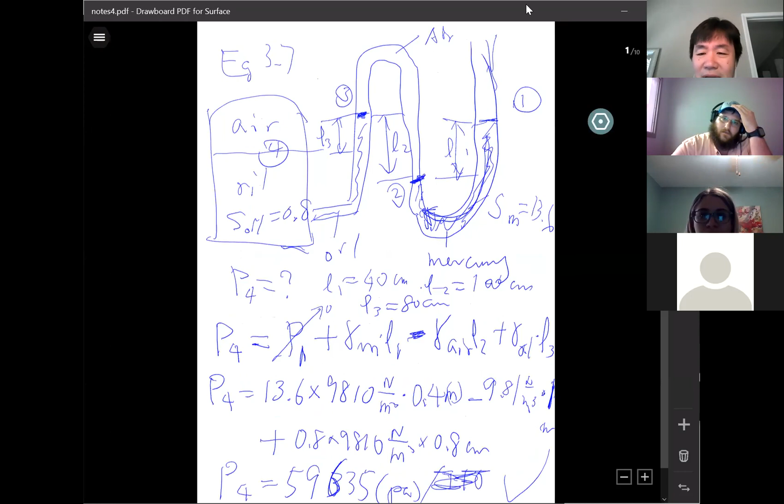Okay, that's the equation I introduced last time. I want everybody to fully understand and completely memorize this method, this equation to calculate the pressure. This is the equation derived from the basic theory in the previous notes, between 2 points on the same fluid, right? P1 plus gamma Z1 equals P2 plus gamma Z2. For each single fluid, you can have 2 points to compare. That's the hydrostatic principle. So if you have multiple fluids, you add those equations all together and it becomes this.

Let's review it again. I just want you to memorize this method, okay? You have to have the starting point and the ending point for the problem. For example, in this problem, you have starting point 1 at the end of the manometer, and your ending point 4, the end of your system, on the surface of the oil in the tank. So you can directly find your end pressure 4 based on the beginning pressure 1 plus all the manometer readings in between. That's the very easy method to do, but you have to remember it.

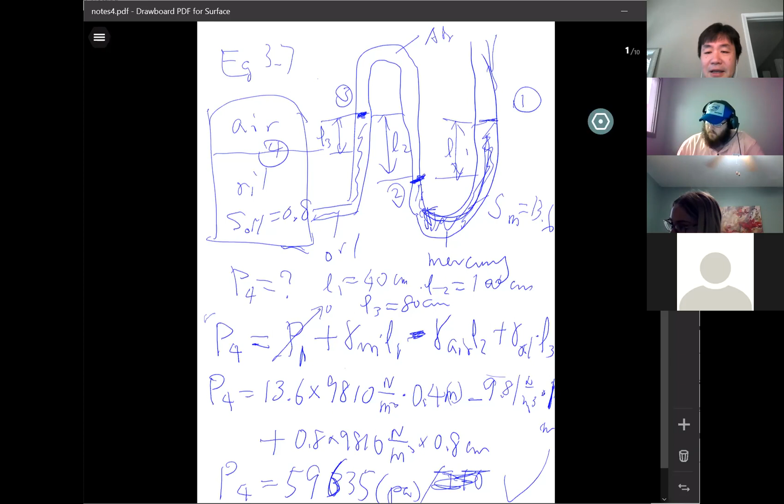So, continue on this. Let me give you one more example on the hydrostatic calculation. I think this topic is very important, and that's why I want to spend a little bit more time on it today.

This problem everybody hates. All the students hate this problem. It's an inclined tube. Every time students see an inclined tube, they don't like it. But I really want you to actually like it. It's a piece of cake to you at the end, I want.

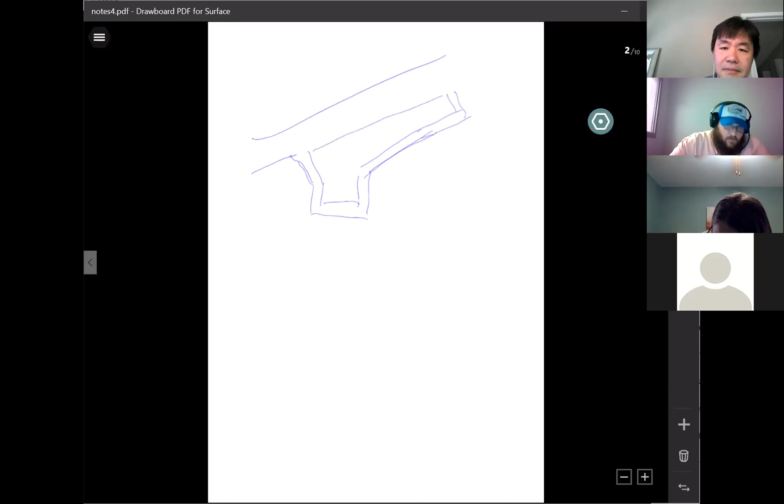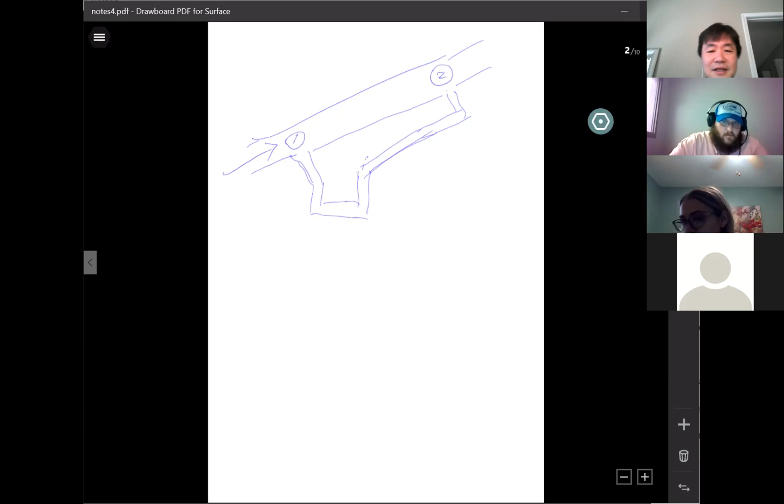Okay, you have a pipe with flowing fluid. So that's bad, right? With flowing fluid in the pipe, I don't have an equation for you yet. So far you haven't learned anything for flowing fluid. Remember, this is chapter 3, hydrostatics - statics. So if you have a flowing fluid, don't try to apply the hydrostatics equation between 1 and 2. That's wrong. Sometimes if you're lucky, depending on the condition, you might get the same answer, but it's prohibited in our class. If between a flowing fluid's 2 points you apply P1 plus gamma Z1 equals P2 plus gamma Z2, no matter what kind of result you have, I will give you totally wrong.

So with 2 conditions, the hydrostatic equation can be applied to flowing fluid: when 1 and 2 have the same velocity, and there's no loss in the pipe. I don't think that's a condition you'll have for most situations. Of course, there's always loss when the fluid starts to flow. So you can't apply hydrostatics between 1 and 2 - just keep that in mind. That's why if we want to know the pressure, we need the manometer down here with a shape like this.

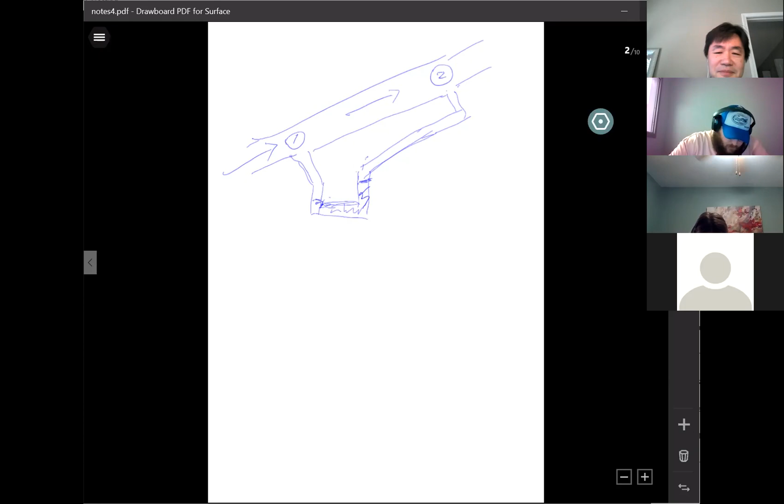Okay, with a shape like this. This is called a manometer - a simple manometer. Like I can draw some for you. Let me draw here, I'll erase it later.

Let's say I have a pipe, and I want to know the pressure in the pipe. What people do is drill a hole in the pipe, then add a tube here. What happens to the tube? The fluid is going to rise in the tube, right? Because internally in the pipe there's higher pressure. This is the simplest manometer, you know.

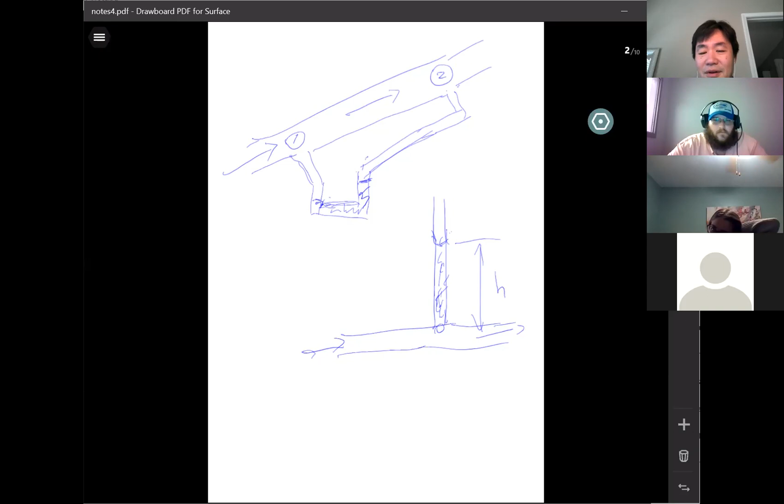How high - what is the pressure? Can you just measure the distance h? If you're given h as 2 feet, can you find the pressure inside? What does that mean if it's 2 feet? What is the pressure? Let's say this is water in there - water pipe.

Manometer is a direct application of the hydrostatic principle. I want everybody to know how to do that. It gives you 2 feet of pressure - let's say 2 feet of height for the manometer. So what is the pressure? Can you do this? Can you calculate the pressure inside?

Let's say the pressure just at this point near the entrance of the tube. Remember, this is a flowing fluid, so your hydrostatic principle is not applying - it's not going to apply to 2 points inside the pipe. So in this problem, what are the 2 points you're going to use to apply the hydrostatic principle?

That's the first task for every problem I give you: you have to mark down your locations, 1 and 2. It's required in every problem I give you. So, where are 1 and 2? Where are 1 and 2's locations?

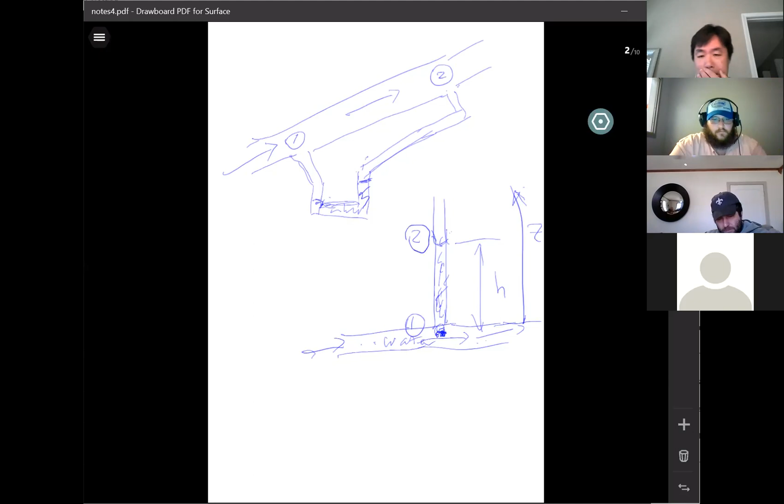At h equals 0 and h, you said h equals 2 at the top? Okay, strictly speaking you shouldn't say h equal to 0 — h is a given value. So in the z dimension, this is the axis. When z equals 0, that's your first point. When z equals h, that's your second point. I understand what you're talking about, but it's not a correct way to say it. In this class, I want you to use the correct language. Does that make sense?

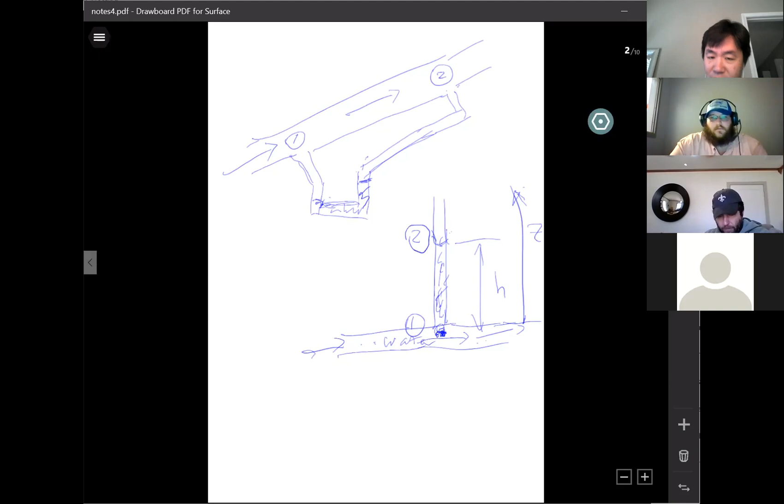Yeah, right, okay, so that's correct. Put down 1 and 2. So what is the question here?

We are asked to solve the pressure, right? What is the pressure inside the pipe at this location? Let's say at point 1 — that's the pressure we want to find out, on the tip of the tube, which belongs to the pipe. Let's assume the pressure is the same along a cross section of the pipe. That's usually what we can assume, since the pipe is basically small along the cross section, so we can pick the point just on the surface of the pipe.

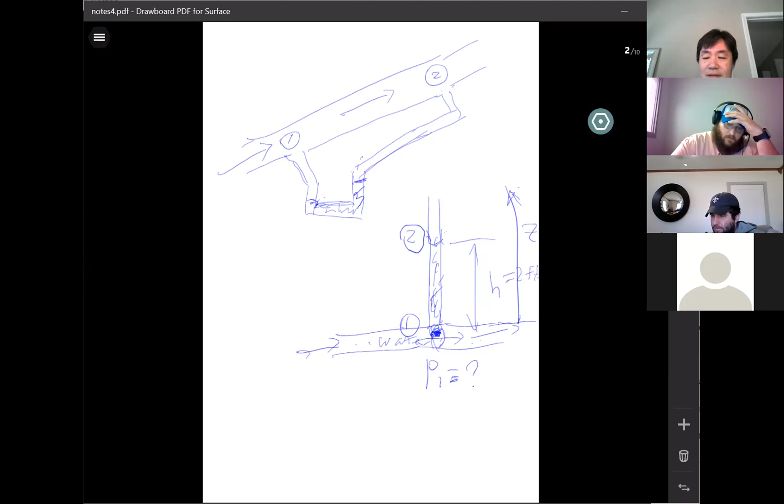So that's our goal, right? We want to calculate P1. So what is P1? Let's say h is 2 feet. What is the P1 value? How do you calculate it? Come on, everybody can do it, right? Gamma H. Yeah, gamma times H.

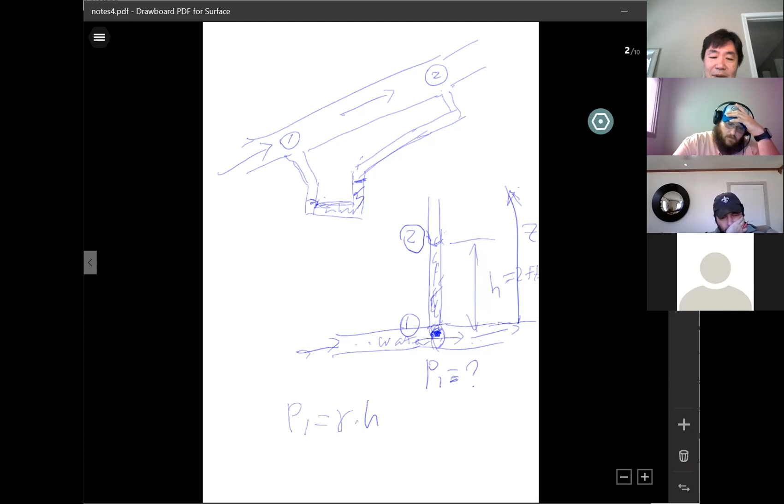Why is it gamma times H? It's P1 plus gamma Z1 equals P2 plus gamma Z2. It starts from there, okay, you're good. Now you can directly say P1 equals gamma H, but actually it comes from the hydrostatic principle like this, because P2 is 0, open to the atmosphere, and Z1 is 0. That's why P1 equals gamma Z2, which is H. Is that clear to everybody? Does that make sense?

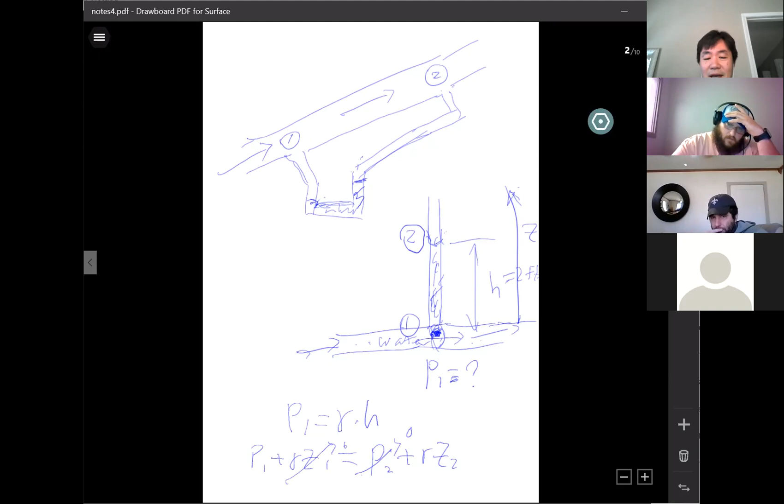Okay, so that's a simple manometer. Again, this starts from the hydrostatic equation — everything starts from that equation. That's why you need points 1 and 2. Here it's simple because point 2 is 0, so P1 equals just gamma H. If P2 had some value, it would be a different story.

That good? This is the simplest manometer, but your boss will kill you if you do something like this in the piping system in his plant. You're going to drill a hole in it — what the heck, and plus the tube is going to be so tall eventually. Usually the pressure in there is going to be high, maybe 2 atm, 14.7 psi gauge — it would go to maybe 30 feet if it's one actual atmosphere pressure inside the pipe.

It could go probably 30 feet for the tube you'd need. Do you have a 30-foot tube to put on the pipe in the factory? No, I don't think so. That's not feasible — this is really bad. This is theory only. On theory it works like this, but in reality it's difficult to apply.

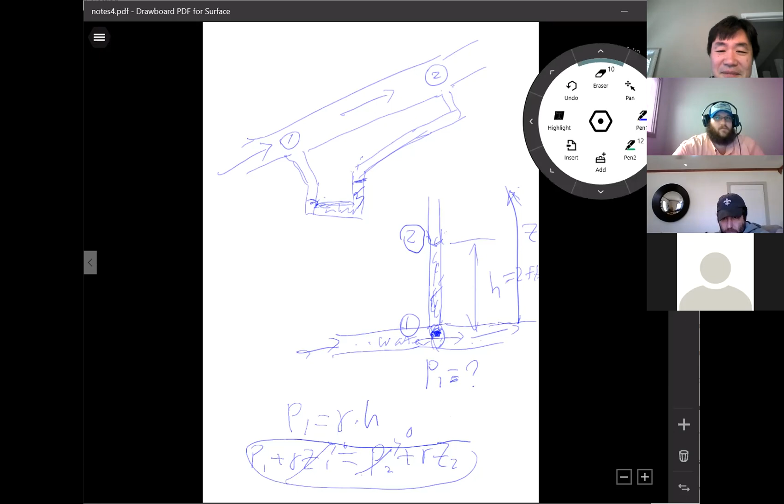But you see, 200 years ago, people wanted to do this, right? Let me erase this thing. So people had no choice at that time — you don't have the pressure tap, you don't have the pressure transducer, or those kinds of electrical tools like 200-300 years ago. But the industrial revolution starts, right? They have to know the pressure, they have to know the fluid system.

So what did they do — people are smart, right? Some engineer designed something like, okay, if this thing is too high, there are two restrictions: one is drilling a hole, the other is the tube being too high to measure pressure. Maybe my boss allows me to drill a hole if we really need to know the pressure, but if it's too high, it's difficult. So engineers are smart — instead of drilling a hole on top of the pipe, they drill a hole on the bottom of the pipe.

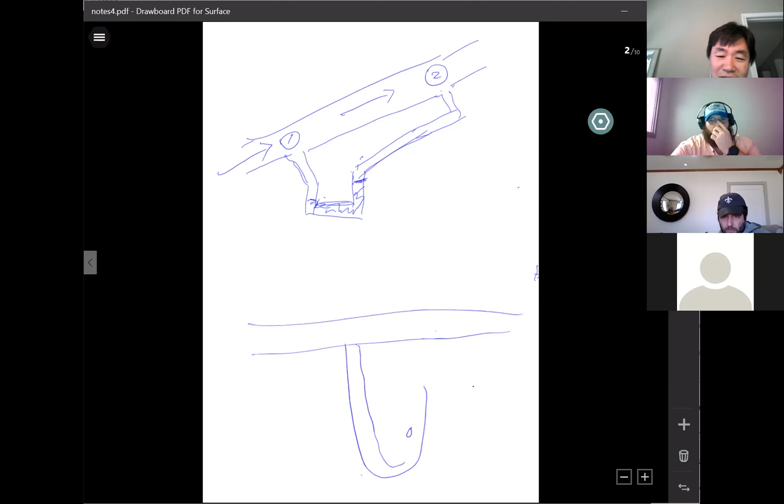And they put a U shape, then put a fluid there — a very heavy fluid so it won't push the fluid up too much. Then you don't need a really long tube. You go down, make a U shape, and put some heavy fluid like mercury. So your internal pressure of the pipe only pushes the mercury a little bit because mercury is so heavy. Then based on the calculation, the deflection here — let's say H is the mercury deflection — can you find the pressure here?

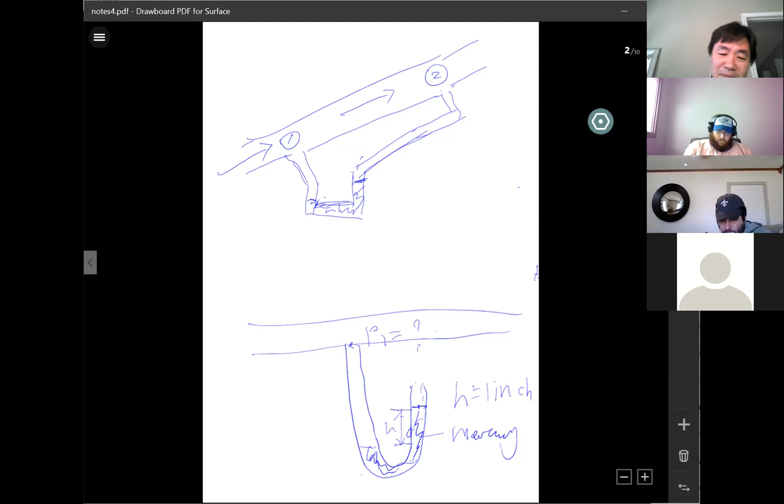Okay, you really need to do this. This really needs to be really familiar. You need to be really familiar with this calculation, otherwise there's no hope of passing this class. So how do you calculate P1? Tell me. Let's say I can measure a distance A here.

Okay, whatever value, depending on how long the device is, right? Let's just use the letter A. Okay, how do you calculate it? You tell me how to do it. What's the first step?

I really like to communicate with you, talk with you guys. Number your interfaces, or number your points. That's right, great Josh, I like it. That's exactly the right way, number your interfaces, number your points.

Okay, 1, 2, 3. I think obviously this one has 3 points. So P1 is our goal. So what's the first step? Maybe you're gonna do. Hey, you can do that method we just learned.

There's multiple fluids here. I don't want you to put 2 equations. Let's just do 1 equation. How about that? Anybody? Give me the equation. I just want 1 equation, directly find out our P1.

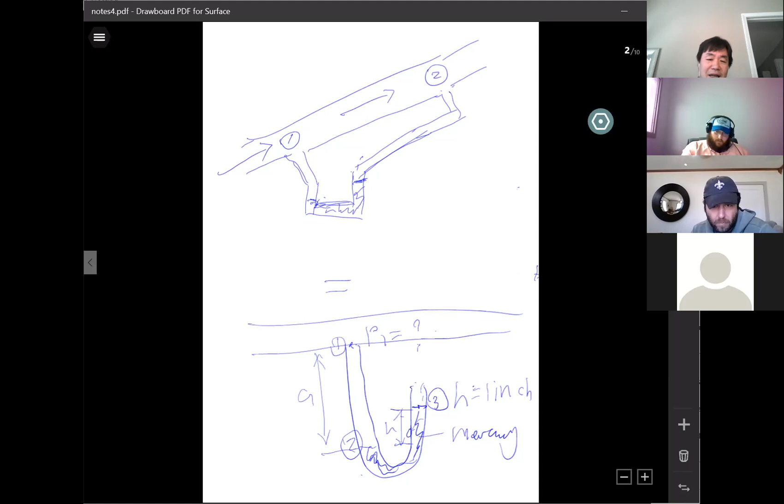So, equal sign. You see, I really like equations, right? Put the equal sign first. I'm gonna have an equation. So what's on the left-hand side of the equal sign? P1. P1. Why is it P1? That's the end point, right? Yeah, end point. Okay, so what is the first term on the right-hand side of the equation?

Gamma air. Let's write the complete equation, starting from the beginning point. I already marked 3 here, right? That's the other end, right? So the first term on the right-hand side will be the other end, the starting point pressure.

Although I know this case is 0, not every case is 0. So have a good habit, write it down, okay? Write the complete equation first before you eliminate the terms, okay? That's always good because 10 years later, you're gonna come back to read it. It's good for you to understand and still remember, or for other people to read, okay? Is that good, everybody?

What is the second term? Plus gamma of mercury times H. That's right, gamma mercury times H. Why is it plus? Because going down, it's 3 and 2, and going down. Good, so next term.

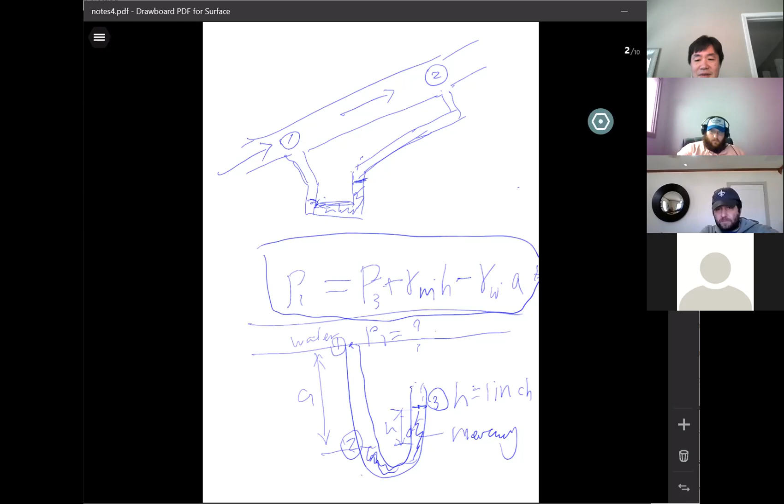Okay. Is that good? Any questions? Everybody? All 15 of you?

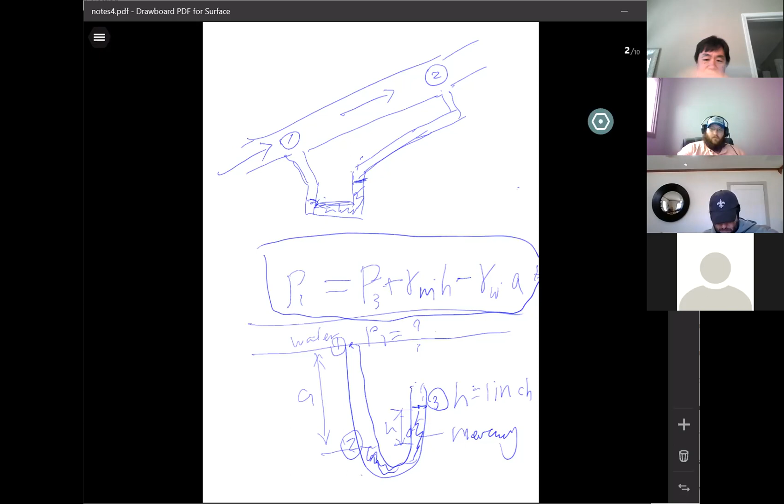Okay, okay, good. So let's come back to our example. Okay, these are too easy, right? Okay, I erased it, I purposely erased it. So it should be in your mind now, it should be in your brain. Okay.

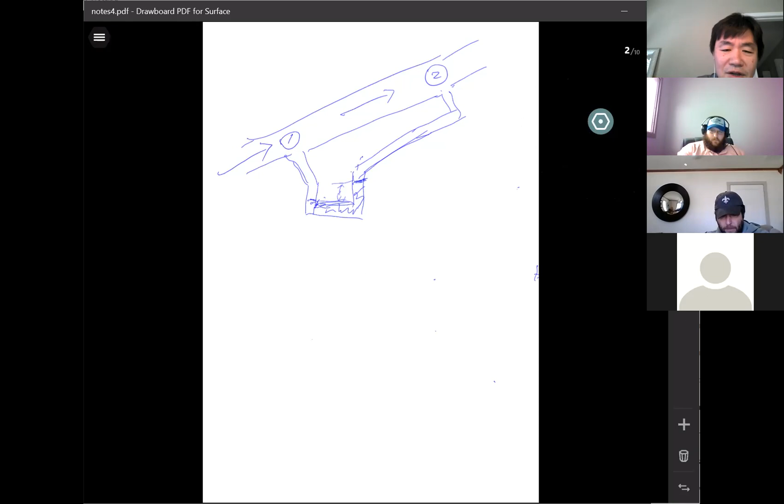Okay, so this problem looks more difficult. Okay, it looks like, hey, this is the inclined tube. Okay, let's say the deflection here in the mercury, this is still mercury. Say the deflection here is what? 1 inch. 1 inch deflection. H equals 1 inch.

Okay, so this is the English unit problem. Okay, what is the gamma of, is that water? I think it's water. Okay, let's say this is the water there. By the way, what is gamma water in English units? 1.94 is the density, right? Times 32.2, so it's 62.4 pound per cubic feet.

Okay, some number you want to remember, this is one of them. Gamma of water, 62.4. Okay, pound force per cubic feet. Okay.

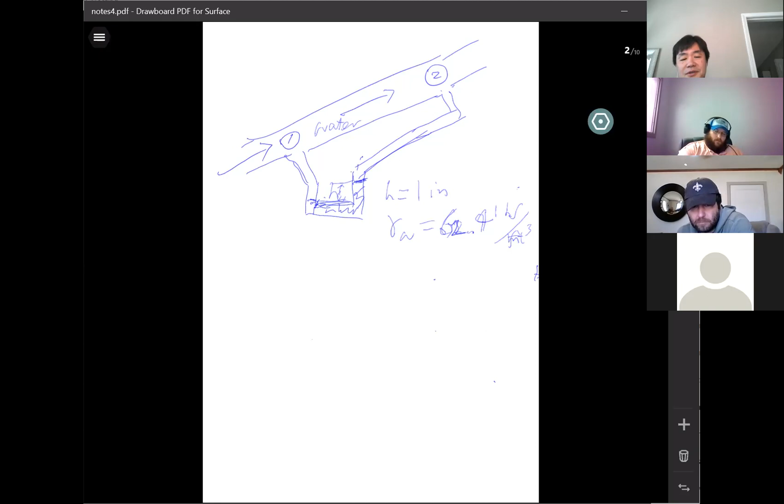That's why I like gamma better than rho g. Okay, especially in the English system, this is more reasonable because pound force is a base unit in the English unit system. It becomes basically pound force per cubic feet. So density in the English system is different, right? It's like slug, 1.94 slug per cubic feet or something like that. It's a derived unit, so gamma works even better in the English system. Okay, so the question is, what is the piezometric pressure difference between 1 and 2?

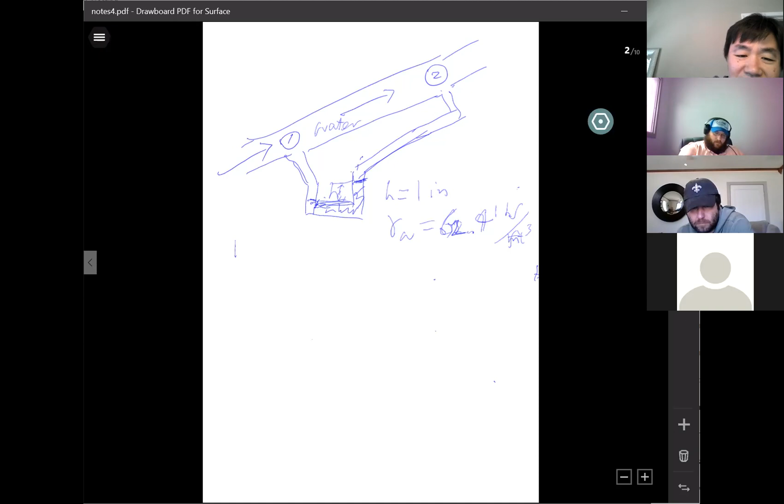Uh-oh. That's the piezometric pressure difference between 1 and 2. The question is the piezometric head difference between 1 and 2.

Okay, so that's our today's quiz problem. Please take a paper, walk with me. Don't worry about it, I'll lead you every step. Okay, so piezometric difference, any questions in terms of the question?

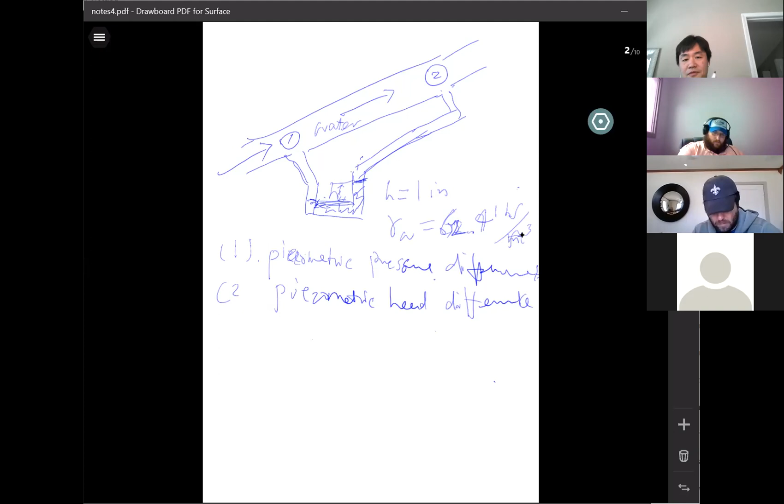Okay, so the first step I want you to do, for question 1, step 1, write down the expression for this piezometric pressure difference. What does that mean in terms of mathematical form? Let me give you a hint.

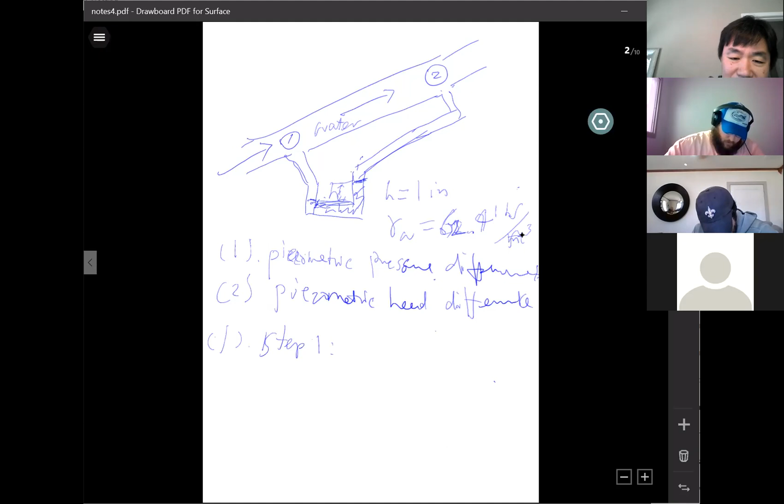So let's say PZ1 minus PZ2. Okay, so piezometric pressure, is that right? This is what piezometric - let's say we use PZ to represent piezometric pressure. PZ1, PZ2, okay, expand this.

Give me an actual equation for this. Don't worry about whatever is inside the manometer yet. Okay, let's say this is the elevation Z. Let me give you some more information, dimensions here. You don't need the dimension yet.

In the book it says the distance between the high level and position 1 is delta Y. The distance between 2 and 1, they call it Z2 minus Z1. The distance between the mercury fluid levels is H, delta Y, and Z2 minus Z1 - that's what the textbook says. The H is 1 inch.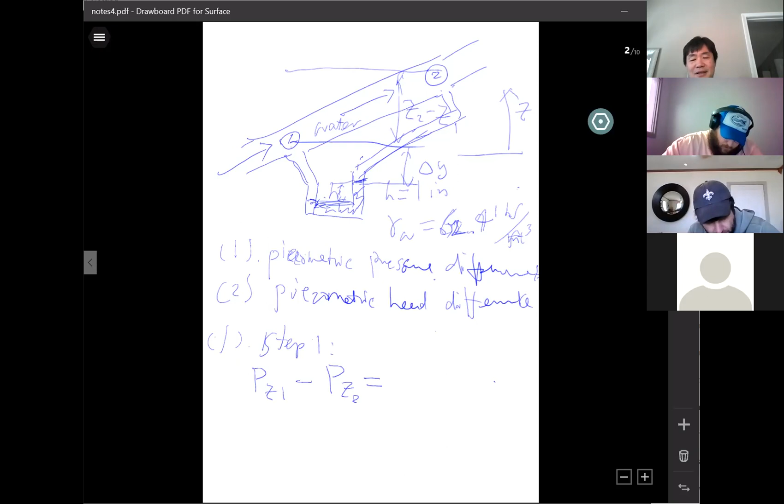Okay, the first step, write down this: what is PZ1? What is PZ2? I want you to say, hey, 2 terms in there minus 2 terms in there. Mathematical expression for PZ1, mathematical expression for PZ2.

Okay, I don't want you to calculate anything yet, just put it down. And for the first step, I want you to also write down 3 and 4 here. I'll write it for you, so just copy it on your paper with the figure - 1, 2, 3, 4 clearly marked. In terms of 1 and 2, don't put anything on 3 and 4 yet. I just want the expression for PZ1 and the expression for PZ2.

Did we talk about piezometric pressure in previous classes? Right, we introduced that. Basically, we said the hydrostatic principle states that the piezometric pressure is constant inside one fluid.

Two terms - piezometric pressure is something plus something, right? I want everybody to be able to write these two. Pressure plus gamma Z. Okay, you already told everybody. Oh sorry. That's all right, it's okay, this is just a five-point quiz. I posted it on Moodle already, so it's only 5 points.

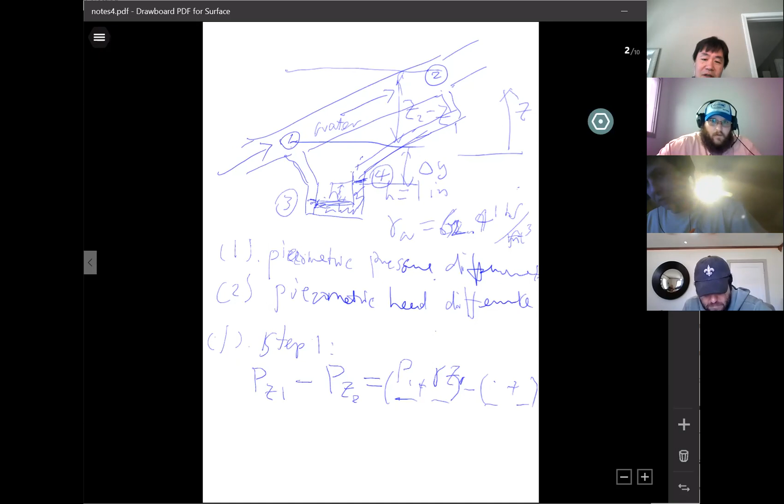It's not really - I'm not quizzing you much. I just want to lead you through the whole process as an example. So P1 plus gamma - tell me, gamma of Z1, right? And the gamma of water. Okay, so you write the piezometric too, on your paper.

So I'm trying to convey something different compared to other classes you probably take. In my opinion, there's a difference between an engineer and a handy person. Of course, an engineer has to be handy too - if you choose mechanical engineering, you're probably already handy, that's what you're good at. But between a professional engineer and a handy person, when you talk about something, an engineer's first reflection is an equation, an expression, a mathematical expression for that term. A handy person, a regular person without an engineering degree, will think about what is reality, what is this, what is that. You probably need to know that too as an engineer, but the additional thing that makes you better than regular people is knowing the mathematical formulation or equation or expression for whatever we're talking about.

That's what I try to convey here - I want to make you a better engineer. So when we talk about piezometric pressure difference, when you first see this problem you're so confused - oh, what the heck is this, piezometric pressure difference, what is piezometric pressure? But think about this: your first reflection should just be to write down the mathematical form for the piezometric pressure. Write it down. If you know the mathematical form for piezometric pressure, basically this just becomes solving that mathematical form, and that will make your life much easier when you deal with real-time engineering problems. Rely on the math - let math translate the physical problem.

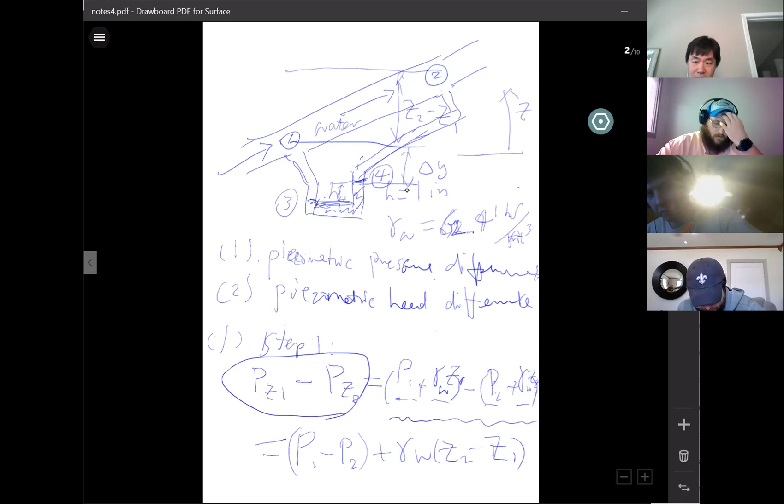Okay, gamma water is a property. So the good thing is I group P2, P1 minus P2 here. So now, next item, next line is yours. Give me an expression for P1 minus P2, going through the manometer.

Okay, you cannot directly get the equation between P1 and P2 in the fluid, in the pipe. It's flowing fluid there, whatever you learned so far doesn't apply. But your goal is to find this expression, right? Stick with your goal. Gamma W Z2 Z1, let's leave it for later. P1 minus P2, you have to have an expression for that. Give me the expression going through the manometer. You cannot directly go from 1 to 2 inside the pipe flow because this is fluid dynamics.

So hydrodynamics, you don't have any equations for that, so forget about it. No equation directly from 1 to 2. You have to go through the manometer part, which is hydrostatic. By the way, do you agree this is hydrostatic in the manometer? There's no flow. You see, every flow, whatever flow, possible flow, is being stopped by the mercury. You're shooting down, and the mercury stopped you. So in both legs with the mercury, everything here, no fluid, no flow, no movement.

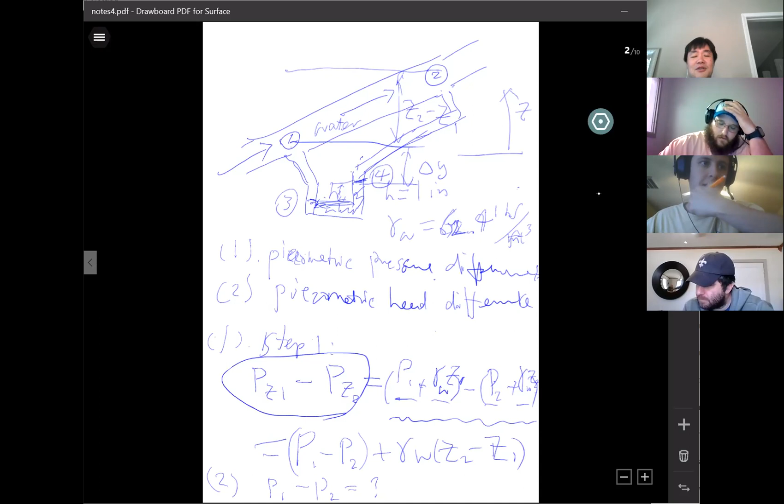Okay, don't read the textbook. I use totally different methods than the textbook. If you copy whatever is in the textbook here, I give zero points. Just follow my steps here.

Okay, open up your head, let me see your face. That means you're done with this step. We can continue.

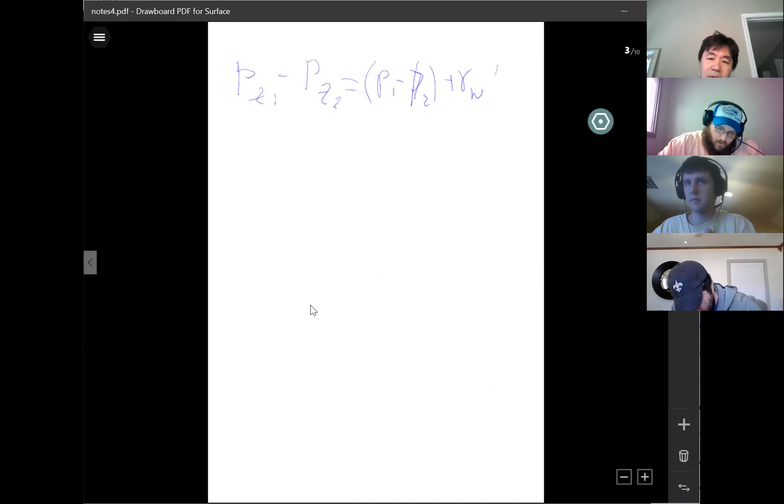I think I have a typo on the previous page. Gamma water times Z1 minus Z2, right? Yeah, Z1 minus Z2, not Z2 minus Z1. What the heck was I thinking? Okay, but anyway.

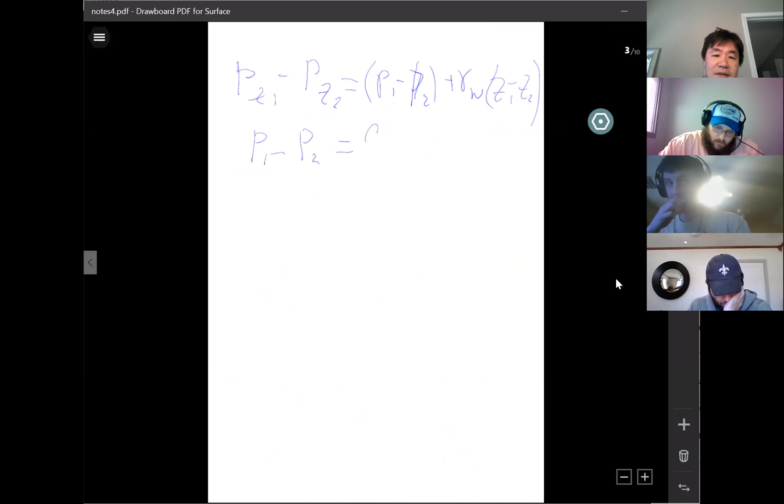So the step I want you to do is P1 minus P2. Find out what this is. This is for grading, okay. A little bit done. It will be a long expression, based on this drawing.

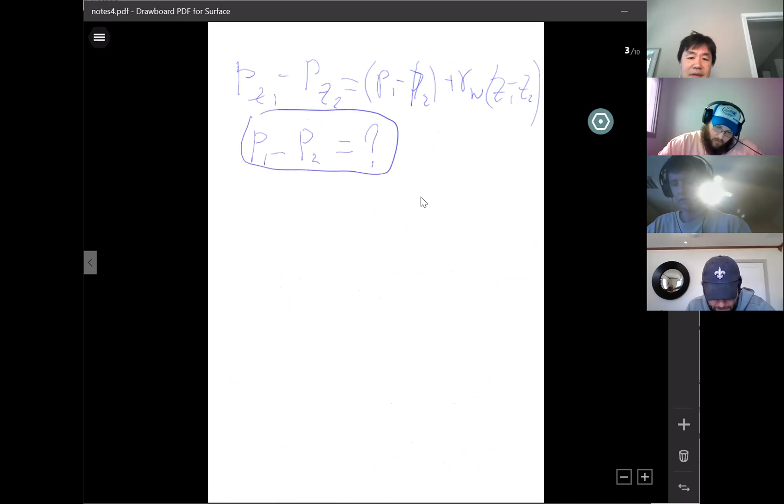Just one line, just put one line. Don't need to continue, okay. Let's continue all together. Okay.

The next step: substitute your P1 minus P2 into this equation. And give me a simplification. Rearrange it. Give me an expression for what PZ1 minus PZ2 equals. Okay.

So this is one point. Let's see, one point, one point. Okay, let's have two points here. The substitution is one point. Substitution and rearrange, some terms can be canceled, then final solution is one point. Okay, this is four points. Let's stop here. I have another point, which is to convert piezometric pressure to piezometric head. I just want everybody to get the five points. I'll go through this, okay?

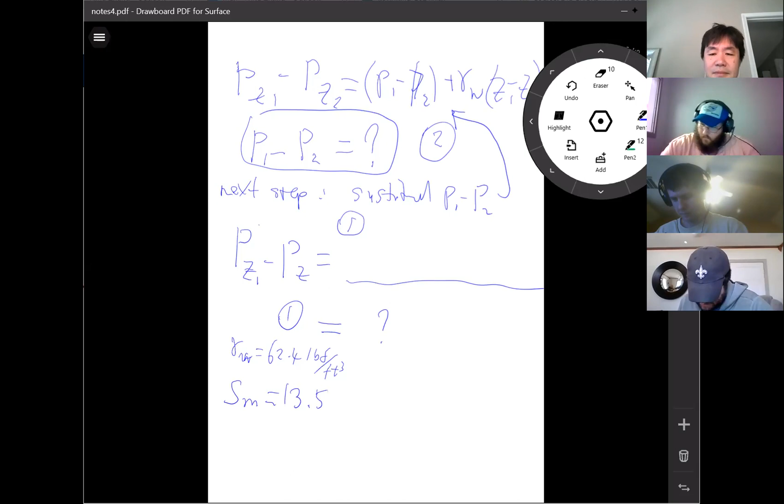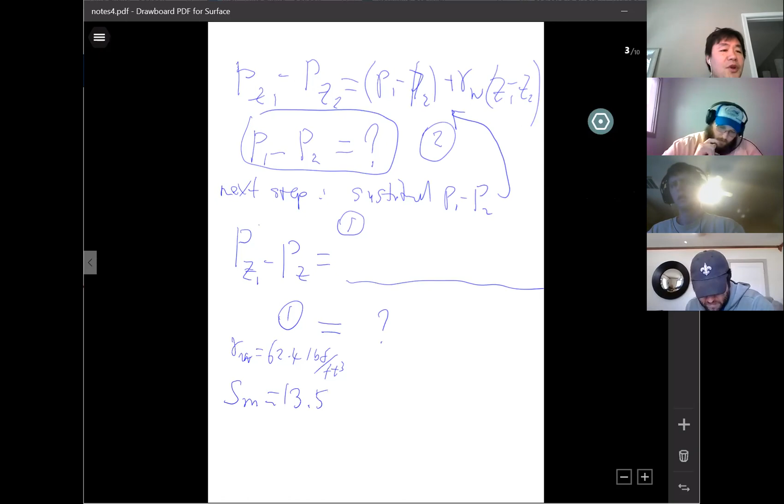Okay, so these are total 4 points. You know how I grade. That P1 minus P2 expression was the most, 2 points. Then after the substitution, simplify the equation for PZ1 minus PZ2 equals something, that was 1 point. The final answer is 1 point for the PZ1 minus PZ2.

Okay, did everybody get done with it? Could you go back to the previous page just for one second real fast? Okay, yeah, I need to see the... Oh, you mean the drawing? Yeah, the drawing. Yeah, sure, no, sure. I didn't copy everything. Okay, yeah, I'll keep this on.

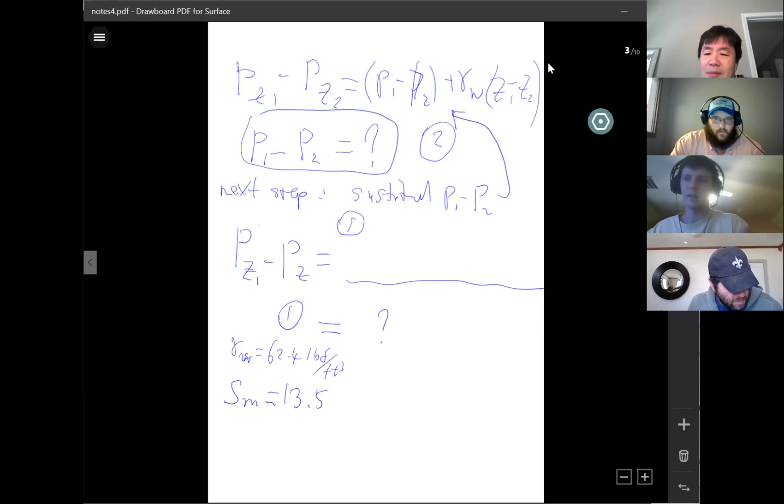Everybody getting there? Feel free to ask questions. I'm not testing you, I just want to know if everybody learned this. Okay, if you have a question, go ahead and ask. Let's talk about it. Professor, yeah.

You said P1 minus P2 being wrong. Did you refer to the numerical value that was within it? No, I just wanted one equation, don't put the numerical value, I don't like numerical value. One equation we just learned, right? Starting point, ending point, from starting point to ending point, right?

The ending point equals the starting point plus or minus, go down, go up, remember? Okay, yes sir, I want you to write it down like that, okay? Then just move one of the P to the left-hand side, it becomes P1 minus P2 equals a long expression. Don't put value there, don't substitute value, don't. I don't like numerical value.

Is that clear? William, right? Yes, sir. Dylan, right? Yes, sir. Thank you. Okay, you're welcome. Is that clear to everybody?

Okay, make sure that step is correct, 2 points, okay, that's the most. The step was worth the most points. Okay, I like the expression P1 minus P2 equals a long expression correct before you substitute. Then the substitution and the rearrangement was another point, okay, but get the 2 points first.

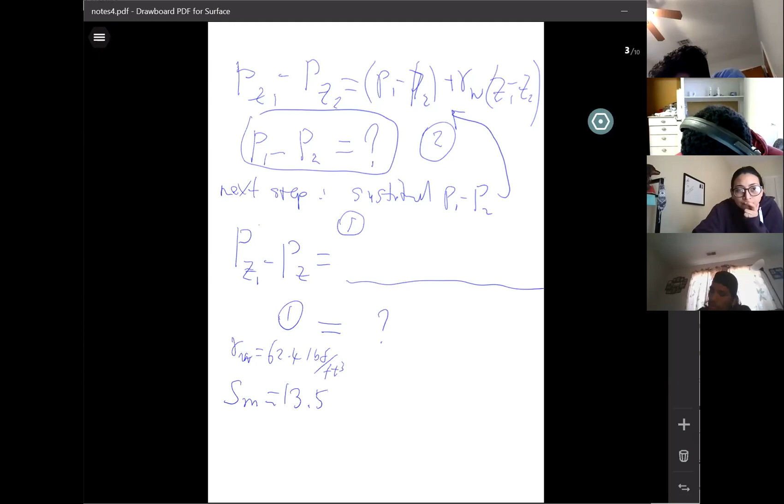Okay, even if you're not done, I need to talk about the last point here. The last point is to convert piezometric pressure to piezometric head. You don't need to go through the whole process again, you just do a direct conversion.

Okay, do you remember what the conversion is? The piezometric pressure is P plus gamma Z. This is piezometric pressure. Piezometric head is P divided by gamma plus Z. This is the pressure PZ, this is HZ. So that's a direct conversion from PZ to HZ. So you have both PZ1 and PZ2 here, so directly convert to HZ1 minus HZ2 with the conversion.

Okay, then calculate the value, you have directly the value, right? PZ1 minus PZ2. So here you can do a conversion and calculate HZ1 minus HZ2. That's the last point here, 1 point. These are the total 5 points.